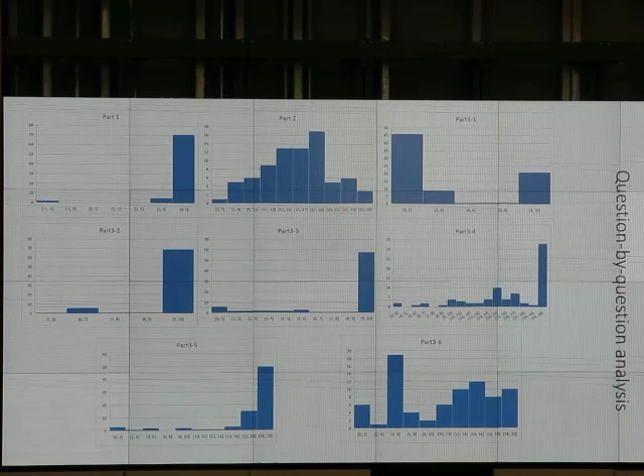The engineer, even if not licensed and doesn't have a PE license, is still responsible for anything safety related that he does. He or she said false. So that's -5, I think.

Now we will memorize that. Part 2, true or false.

You can see the distribution. I think I like this one. It shows that one person got between 5 and 7. That means maybe he or she did a lot better on the calculation part. So this can spread between the person who memorized something and those who didn't try to memorize anything.

But look, this is not that important, okay? So we have 90 points from calculation, right? The memorizing part is just 10 points. If you have 10 points from the memorized part and 90 points from the calculation part, you get full score. You don't have to memorize much. You can just do the ethics part and memorize just 5, and then you're done. You get full score on calculation and then you're good, right?

Part 3, question 1 is about this. It's about doing the conversion.

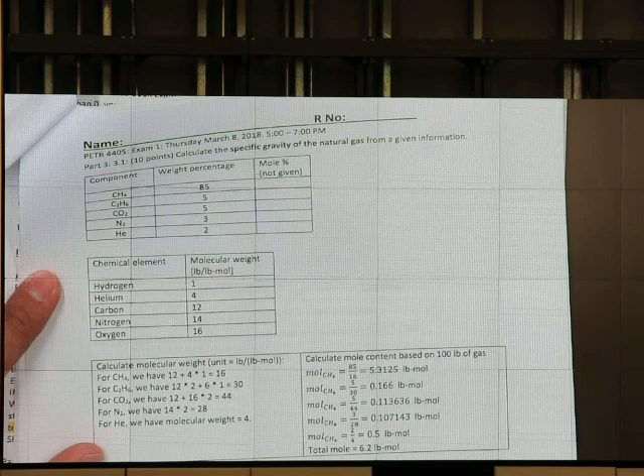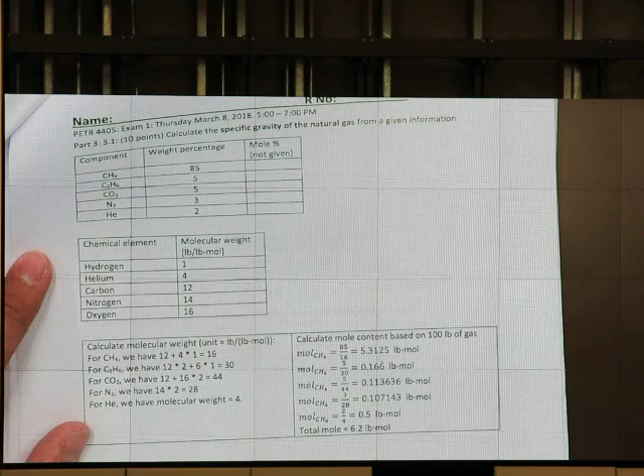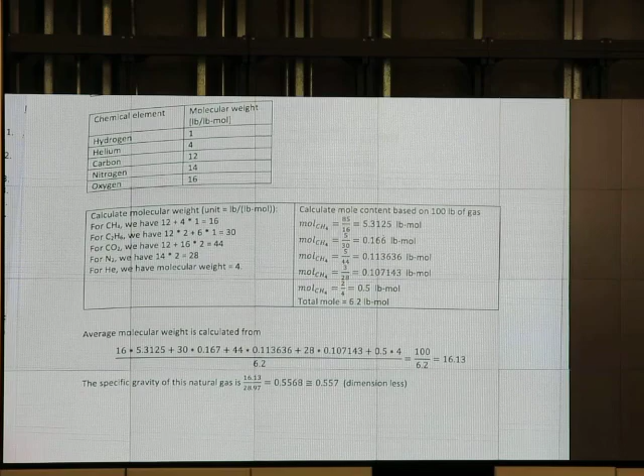So there's a solution: calculate the molecular weight, get the mole percent first, and then do the weighted average. Is it easy enough? Yes, and we have something similar to this in homework. Did we? Yes, we did. Okay, I won't show it to you. I can show you this instead.

Okay, on that question, 45 students did it wrong. Oh no, 20 students did it right. So 2/3 of you did it wrong. Try to improve, okay? It's not that difficult.

Part 3, question 2 is this: calculate the theoretical pipe size. It's quite concerning that we have this part of students who didn't do it correctly. You know why? Because this time the equation is given. Everything is given. What you need to do is just put the number in the formula and do the calculation. That's it, right?

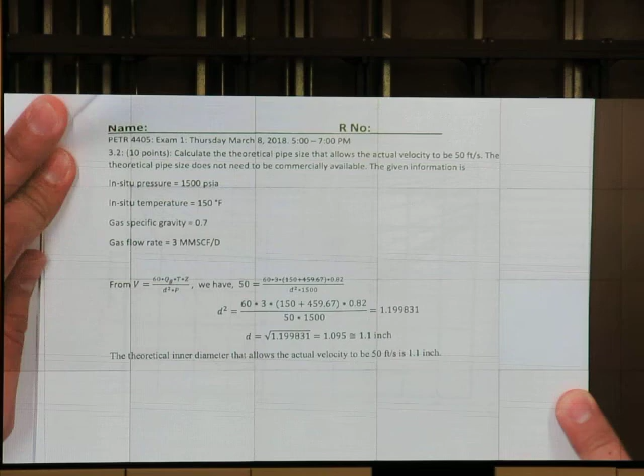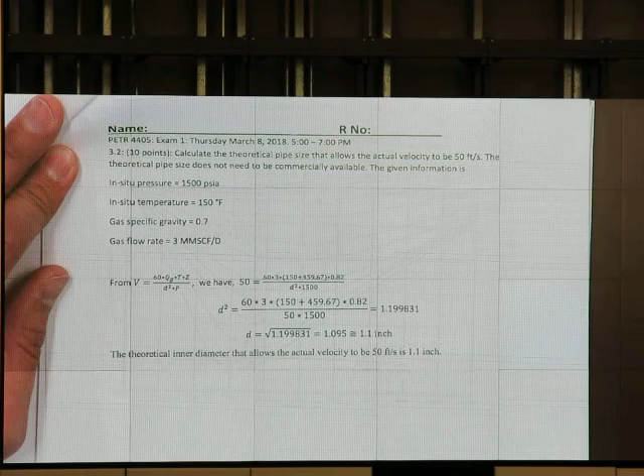It's about this: 3.2, V equals 60 something. Put the number in, do the calculation, get the diameter. Just that. I think you should be able to do it, right? And almost all of you did it just fine.

Okay, so not all of you. Less than 70 students. We have 78 students in this class. Less than 70 students got 10. Okay, some of you did something wrong, and one of you may be very wrong.

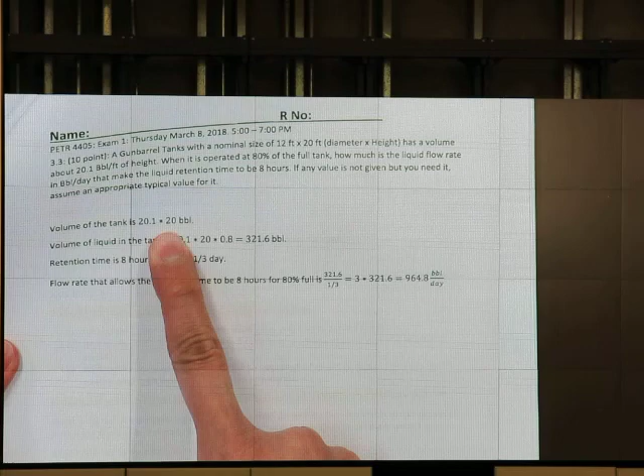3-3. Most of you can do this, okay? 3-3 is the tank calculation. Okay, volume of the tank: 20.1 multiplied by 20, and then we get barrels, right?

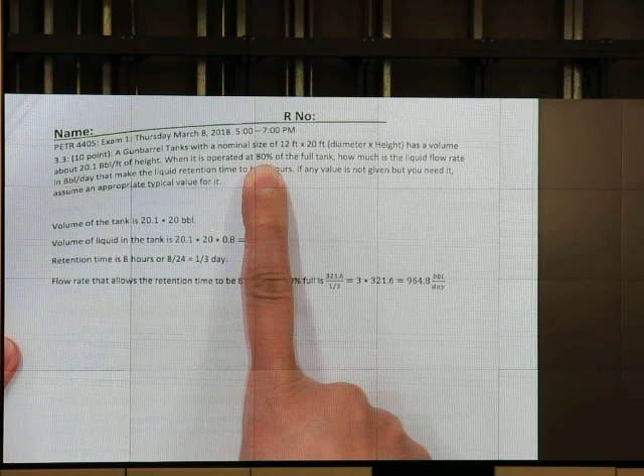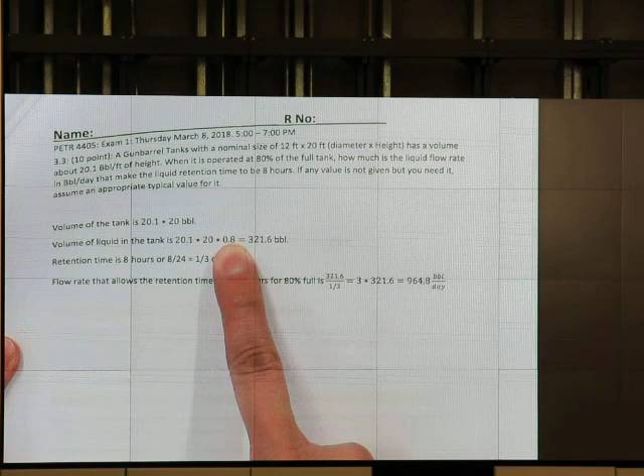20.1 is barrel per foot, and we know that it's 80% full, and we know that it's 20 feet in height, so 20 multiplied by 20.1 gives us the volume of the tank. Multiply by 0.8 because it's 80% full. Retention time is 8 hours, or 1/3 of the day. The flow rate that makes this much retention time, we just take that number divided by 1/3 to get that value.

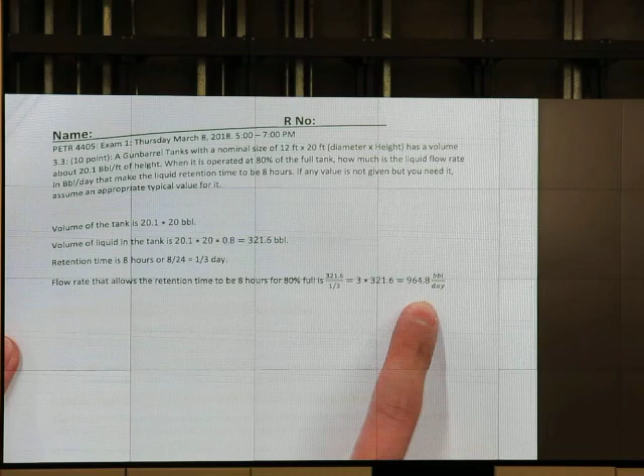Very, very easy, is it? Very easy. Let's see how good I did.

Oh, I did very good. Most of you, more than 60 students, did it just fine. Maybe about 20 students didn't do it correctly.

Okay, some of them scored between 0 and 1. What's going on here? I understand that the formula is not given, but you must be able to do it, okay? For the easy part, you should be able to do it. So if you come to see me and say, hey, it's very difficult, I will disagree, of course, because the majority of you did it right. If you want to tell me now who these people are, you can raise your hand, or maybe just come sit in the front seat so that you can improve.

Okay, 3-4. Most of you did it right. Some of you maybe made some mistake in the calculation, but that person didn't do it or something. I'm so worried about her or him.

3-4 is about the incoming gas line heater, right? Line heater question, this question.

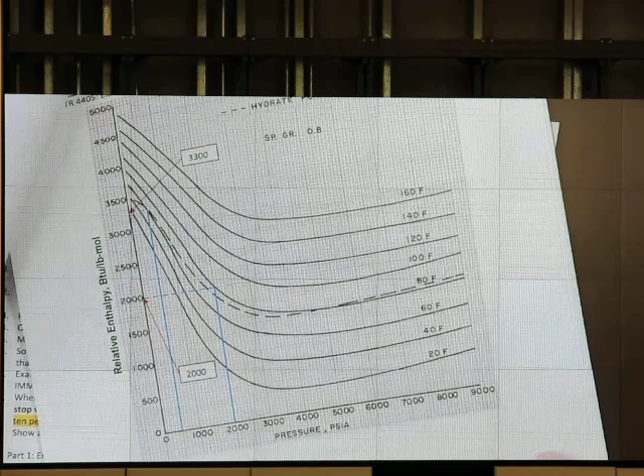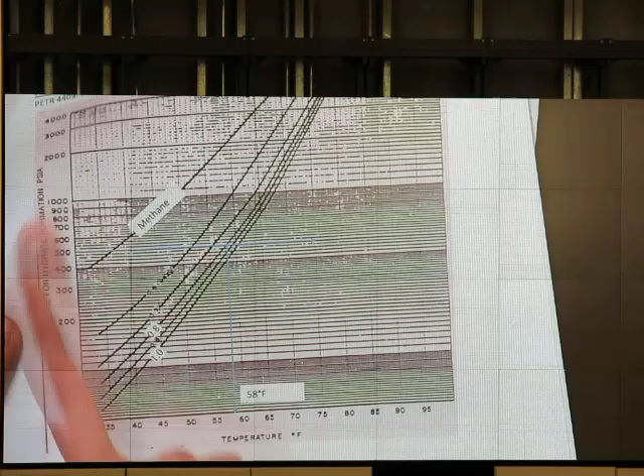Okay, one thing about this question on the line heater. Is this just a graph? You see this graph? It is in the exam every year, okay? If you get 0, it is not my fault. If you look at this graph it can give more accuracy than this graph. The dashed line here does the same function as this graph, the hydrate phase envelope, but if you do the reading from here, it's more accurate, all right?

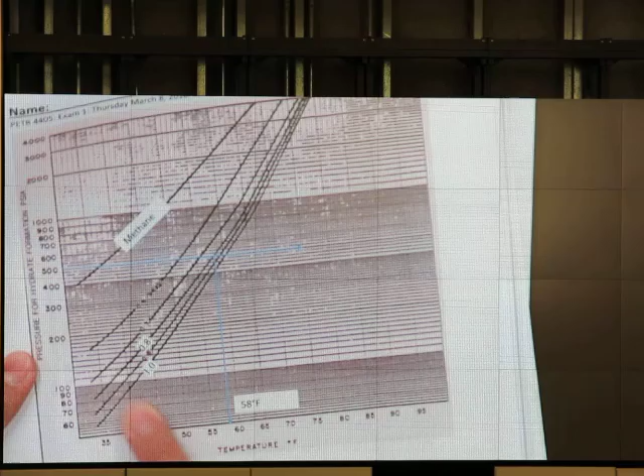And it's a line heater calculation, okay. That's the solution.

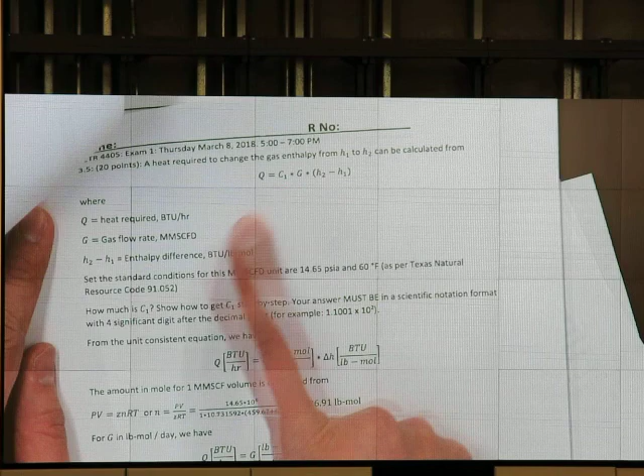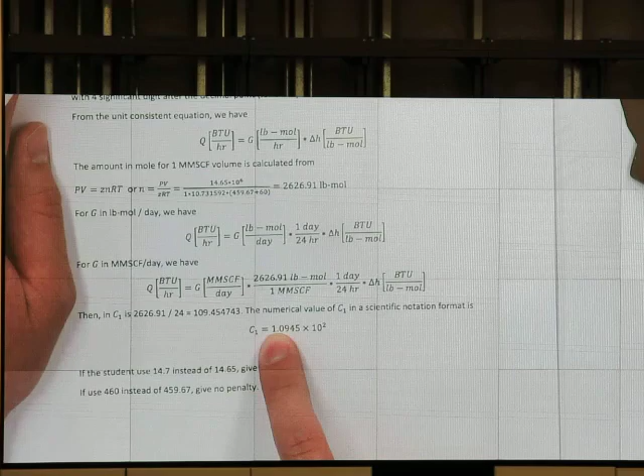And next is, calculate how much is C1. This is example of the solution, which is very close, right? This is about 110. The answer that I got is about 109.45. So if you get something close to the hint, you should be fine.

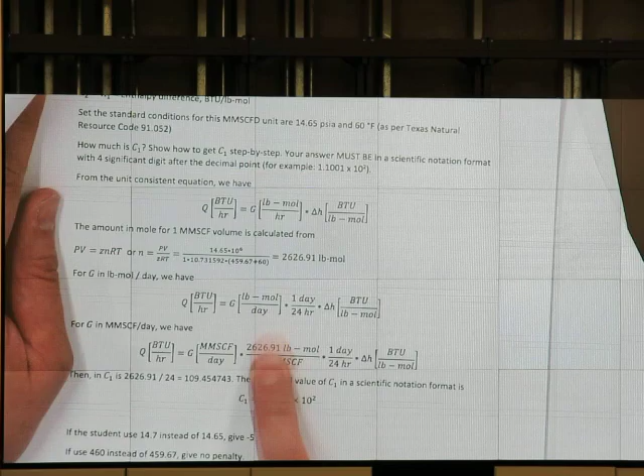Or you don't know that that is a hint in the exam. Probably not. Here's the derivation. And the last one is the compressor, vapor recovery unit.

So derivation of C value. I have 50 students know that there's a hint over there, so they get it right. They do until they get it right. About 15 students, yeah, maybe make some mistake, and some of us didn't do it correct. What's going on here? Is this too tricky?

Of course, the problem with this one is that I think it's fair because most of you get it right, but the equation is not given. You have to be able to come up with the equation by yourself. Okay, so this means you understand the principle. Okay, last one. I think I like this one more.

Okay, compressor equation. We grade it like this. If you use PSIG instead of PSIA, and you didn't assume interstage cooler, I think you get about 5 or 8, I don't know, but less than 10. If you use PSIG and use interstage cooler, maybe 8 to 12 or something. I have to check with grader.

If you didn't do interstage cooler, but you use PSIA and do everything right, I think you get about 12 or something. If you use interstage cooler, use PSIA, do everything right, you get 20. Okay? And I have some question about the exam.

If you recall, when we have interstage cooler, interstage cooler help us on doing what? Reduce the amount of horsepower, right?

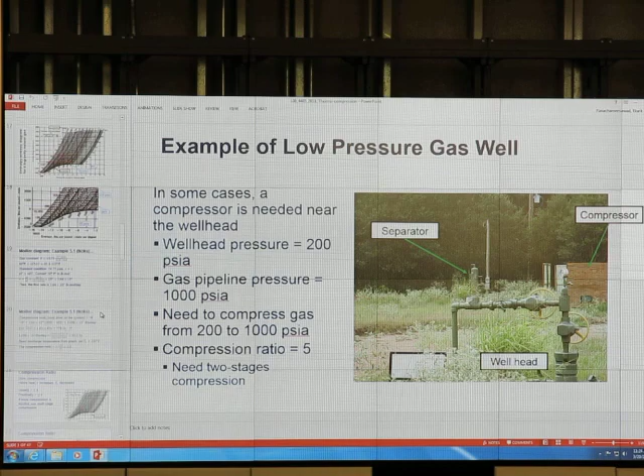Are we fine? We don't worry much about the solution. You want to come up front? Do you want me to ask you to come up front? Not yet? Okay, I don't do that yet, but if you talk again, I will ask you to come sit in the front for the rest of the semester, okay?

Okay, two-stage compression. Look at this. We need the interstage cooler for sure. There is no point to do more than one stage without interstage cooler. When we have interstage cooler, the horsepower required to do the same compression is less.

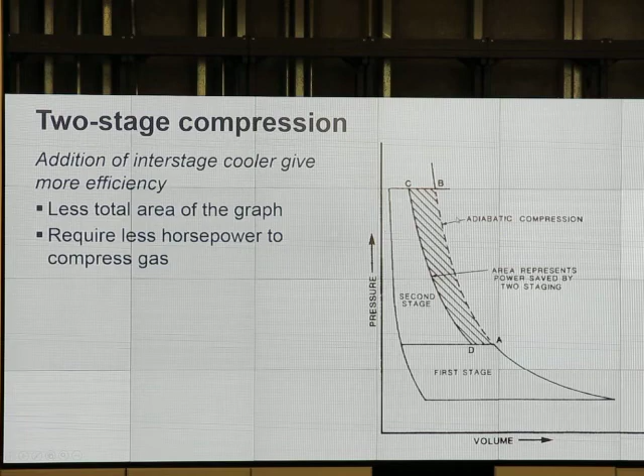Okay? And not only here, what about this picture? Did I not explain that we have interstage cooler? Yes, we have interstage cooler, right? But when it's not obvious, I told you in the class, right? Use your best engineering judgment to do the exam. Decide the best you can.

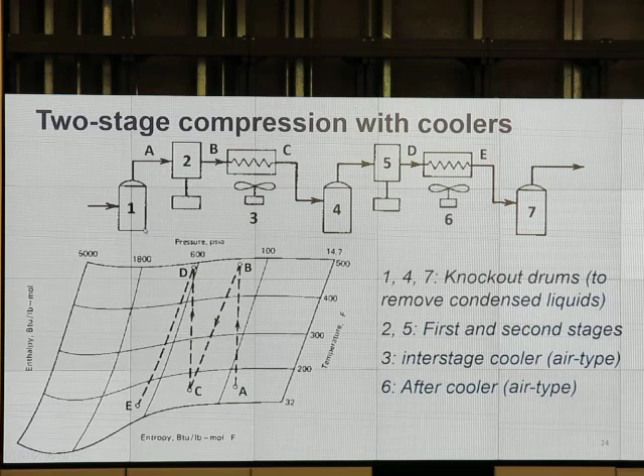And if your engineering judgment say no interstage cooler, I think that's 12 out of 20. Okay?

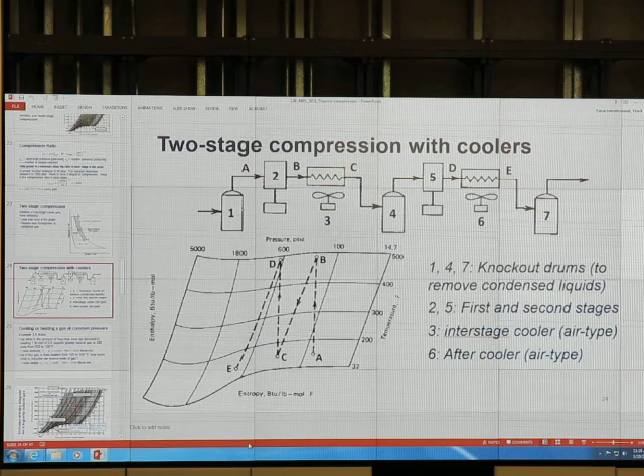However, I don't think you have to worry about this one too much. It's just a bonus. Okay? It's just a bonus. We can do 100. Okay? It's just a bonus part.

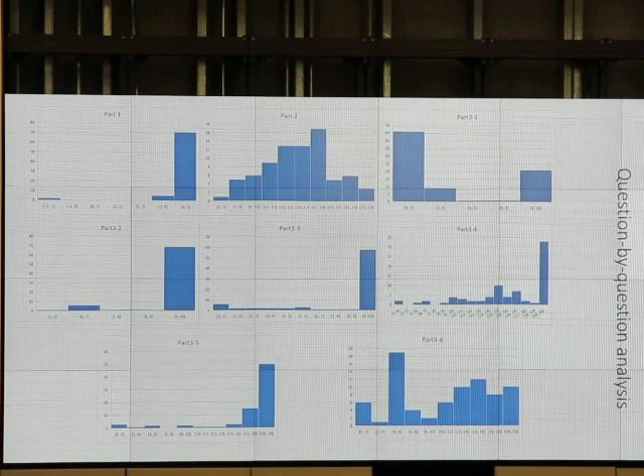Okay, look at this. I have one student get 120. Do you want me to name him? Or do you want to name yourself? No? Okay, let's skip. We have two students that 118.

I want to clap for him. Let's... Oh, no, let's not clap for him. I only me, okay, just me. Okay, one student get 116, 115 or something, and we have how many people?

Many people, okay. 100 and above is this much. Okay, that's 100 and above. So I have about 3, 4, so more than 10. More than 10 get 100 and above.

So after adjustment, after we cap it, 19 students get 100. Okay, 19 students get 100. If you are not one of that 19, it's okay. If you still within this group, maybe this A and B and C. Okay? If you are over there, it doesn't mean that it's hopeless, but just try more when you do. It's not hopeless, okay? You can still get better grade.

Please do more when you do the project and the exam 2, okay? Exam 2, the style of the exam is similar to this exam 1. So calculation is a must, okay?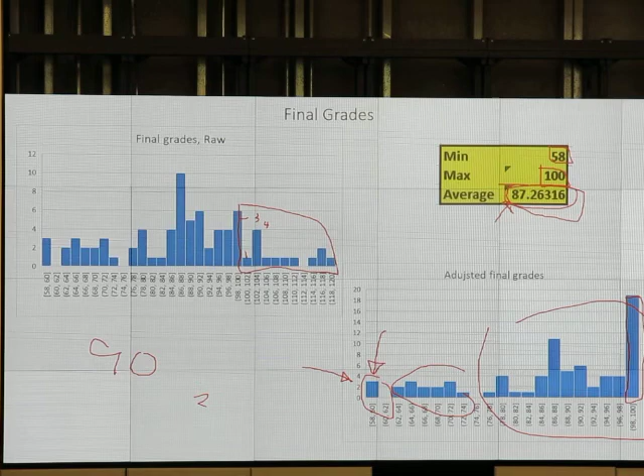So you would say something like, if within the information given we don't have the information on whether the emulsion is tight, loose, or moderate, to get this information the bottle test is suggested. Bottle test can be conducted by measuring the time of separation of water from emulsion, and emulsion is prepared by mixing water with oil, shaking it, and waiting to see how much it separates.

Do you remember this from lecture? Let's discuss a bit more. Most of the time for light oil, the emulsion problem tends to be small. For heavier oil, or lower API gravity oil, the tendency to have emulsion is high. In this project, we assume the emulsion to be moderate. This is to be on the realistic side.

Do you produce water? You have water? What is the API gravity? 10 to 30? Much higher, about 45. Oh, no emulsion for 45? You expect no emulsion, right, because it's very light. But you will still have to discuss that the bottle test is suggested to ensure that there's no emulsion at all, or something like that.

Good? Yes, sir, question on the project. Do you know that this time, those who are in the same group must submit the same thing? You know that? Who is only one person in this course? Just you, you are only one person on your team. Do you need help? Do you need more help? Exactly, okay, exactly, please go see Arya tomorrow, or maybe me tomorrow, okay?

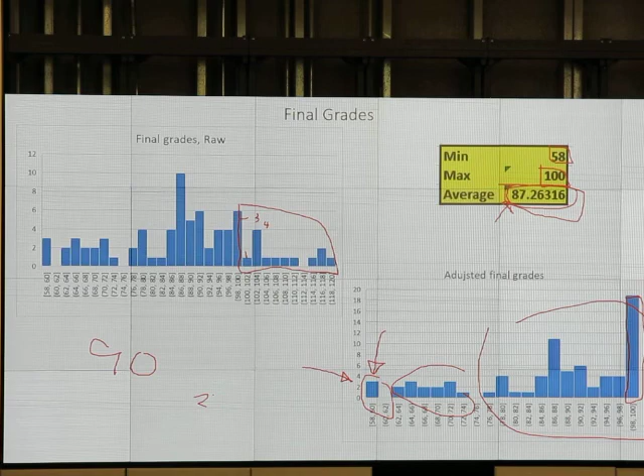No more questions? Question on the homework? On the project? Not yet? Okay, let's continue. What about the quiz? Were you able to do the quiz? You did it just okay because it's exactly the same, right? Maybe I made it a little easier so that you don't have to use a calculator, just that.

Let's continue with the pump calculation. Last time we stopped here, okay? We talked about the pump, we looked at the video, and we talked about the Hazen-Williams equation. And I told you that we don't use it, okay? Most of the time we don't use it, but the only case we use it is to double check whether the answer we get is correct or not.

No volunteer? Demila. Okay, why don't I use Hazen-Williams equation? What's the problem with it? Yes, you, Demila. I didn't volunteer though. I asked you, there's no volunteer. Actually, there's one, but I asked you. What's the question? I see you keep looking at your cell phone. Checking my grades. Your grade is good, I think.

So Hazen-Williams equation, why do we not use it? What's the problem with it? What's the limitation of this equation? Don't tell him. Damila, come on. What?

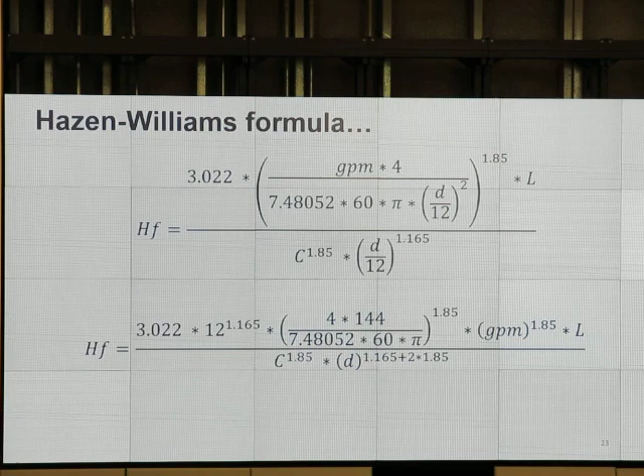So thank you, sir. The limitation of Hazen-Williams equation is it assumes water viscosity for every calculation. Do you have water flow in the pipe, or oil? Oil, right? You don't have water, you have oil. So if we do the calculation with water, if your viscosity is close to water, it's fine. But close to water means 1 centipoise. Even condensate viscosity is about 2 to 3 centipoise, maybe 4, depending on temperature. Crude oil viscosity can be 8 to 10 centipoise. If it has water in it, it can be 20 centipoise. So Hazen-Williams equation is for 1 cp only. It's going to predict some lower value than usual, because it assumes the density and viscosity of water for the calculation.

So in the quiz, if I ask you, between Hazen-Williams equation and Colebrook equation, when we calculate the pressure drop, which equation gives us more pressure drop? You should be able to tell me, for the case of oil, that Hazen-Williams equation will give us less pressure drop because it uses water viscosity. When we do the calculation for oil it's off, but it's good in the sense that it's a quick estimation. At least the pressure drop has to be as much as what we get from Hazen-Williams equation. If we get lower than that, for the case of oil, this means there's a problem.

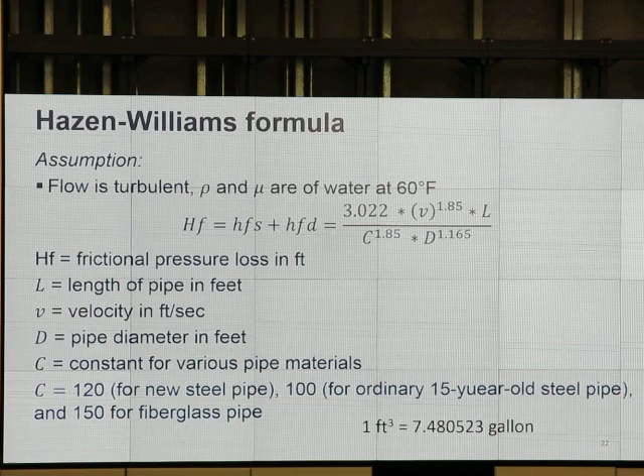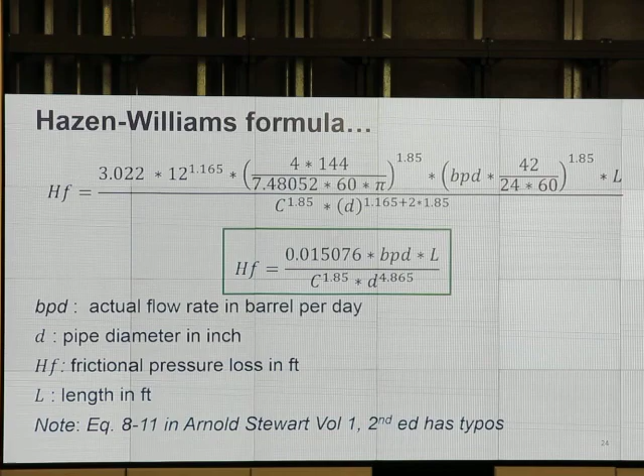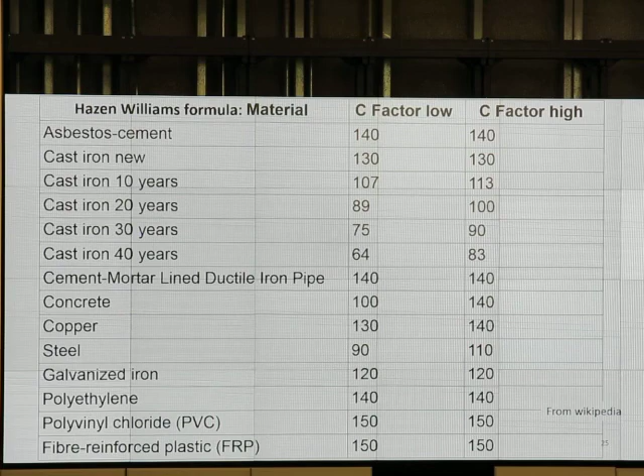And the formula is easy, we just put the numbers in and get the value, get the head. This is pressure drop for the case of liquid, mostly water. So do we not use it at all? We can still use it, but keep in mind that the actual pressure drop will be higher than this, because this uses water viscosity. And C factor is about the roughness of the pipe. We just put the roughness of the pipe in, do the calculation, and get the result. If the pipe is rough, we have more pressure drop. If it's smooth, we have less pressure drop.

Another one is the Moody diagram. Moody diagram has two parts. This formula, you see this one: delta P over L equals F rho V squared over 2D. If it's fanning friction factor, you don't have that 2, it will go on top. But for Moody friction factor, the formula that you have is already correct.

Are you ready to memorize this? I'm asking you to memorize this equation, at least for the next quiz. Delta P over delta L equals F rho V squared over 2D, and that F is Moody friction factor. You need to know that. If I write 2F rho V squared over D, then that F is fanning friction factor. You need to know that Moody friction factor is 4 times more than fanning friction factor, or fanning friction factor F sub F multiplied by 4 equals Moody friction factor. You need to know this. Memorize that, memorize that.

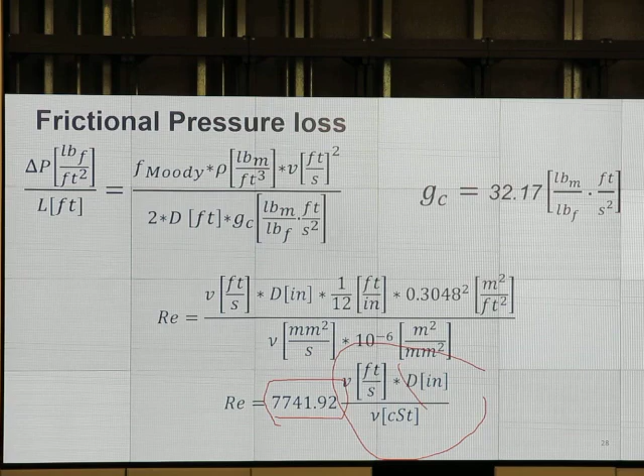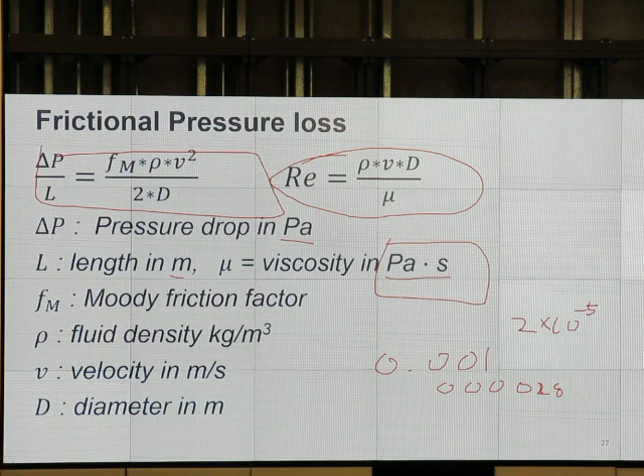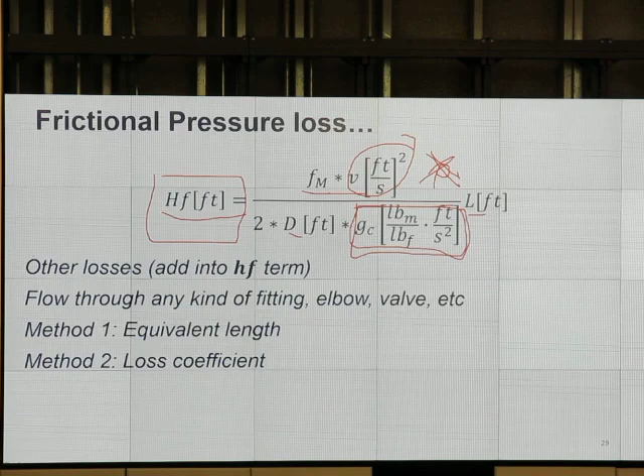All right, frictional pressure loss, H sub F, that one we put it where? Where's my friction thing? Over here, right? So frictional pressure loss depends on velocity squared and is linear with length. So for the same pipe, if we increase the flow rate 2 times, pressure drop, frictional pressure loss goes up how much? 4 times, roughly. I say roughly because there's something to do with F sub m too. F sub m is a friction factor and it's a function of Reynolds number and roughness. So we know how to do that calculation. When we put everything together, we can do the pump calculation.

Who has not done this yet, this particular example? Have you seen it? Basma, have you seen it? No? Levi, have you seen this? Yes sir. Stephen, no? When did you take your fluid mechanics class? Chemical engineering department or what? Who taught you fluid mechanics? What's the name of the professor? You want to blame the professor?

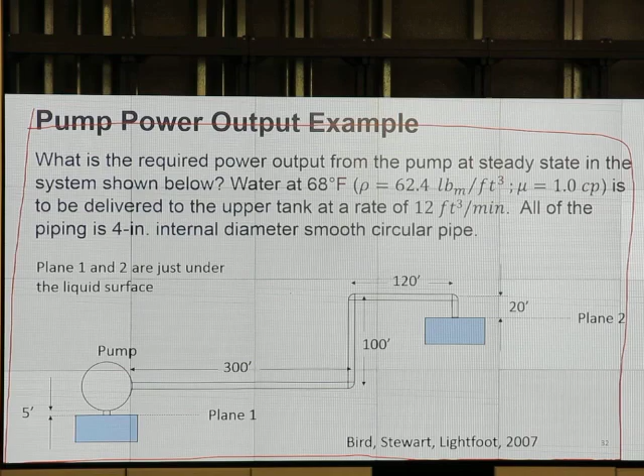It should be there, this question should be there. What did you learn, friction factor? Okay, just that, not this one. Have you used this before?

Will you remember on the exam, sir? Okay, you don't need to know anything until the exam date. On the exam date you will be able to do this. This equation, I think it was given on the last exam, and I think I will give it again, but I will give just that, not the explanation of what is what. And that is for your headache, okay? The given part is on the top, just that.

But you need to know, right? What is this, V2 squared minus V1 squared? What is that, Stephen? What's that about? First of all, Stephen, what is the name of this equation? Could you please read it?

That's the name. Okay, instead of saying you don't know, that's the name.

So this is mechanical energy balance. This tells us that the only way we can have the change in velocity, combined with the change in elevation and the change in pressure, depending on whether we add work into it or how much friction loss and accelerational loss, E sub V. E sub V is accelerational pressure drop.

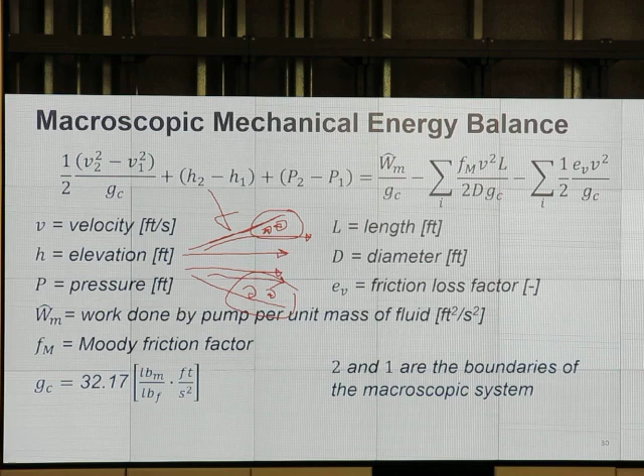If we do the actual design, for a 45-degree elbow, the textbook says 0.3 to 0.4. What do you use?

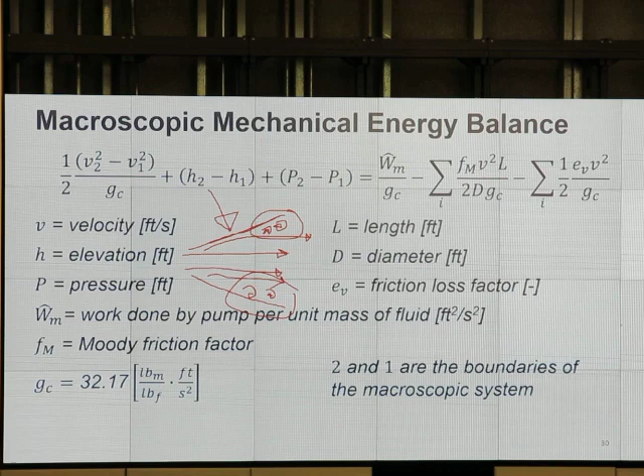Beck, J. Martin - high value or low value of E sub V if you want to be very conservative? Taylor, do you want to use high value or low value for maximum possible pressure drop? High - good, yes, because they add together. E sub V represents the loss. If we want to be very conservative or get the most possible pressure drop, we use the high end value. You don't say, hey, I want to be conservative and use the lowest one - no, we use the highest one.